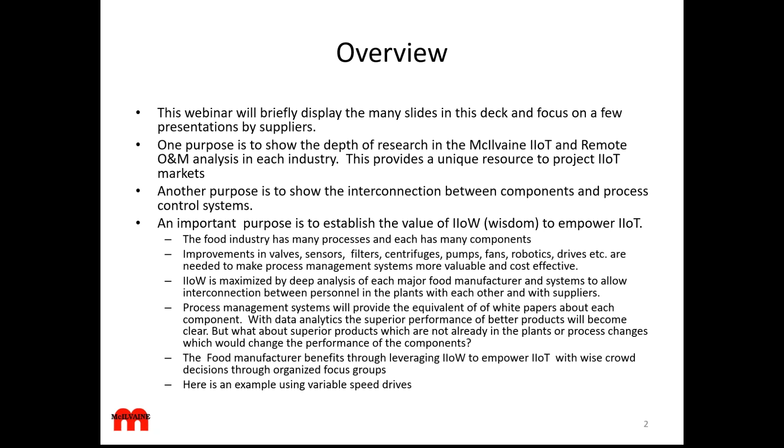Here's an example for variable speed drives. You've got two plants: one makes fructose and another one makes protein. In the fructose plant, you're recovering the energy, thereby reducing the amount of steam that's being used, with mechanical vapor recompression. That requires a fan, which also can utilize a variable speed drive.

And all of that can be remotely controlled in the cloud through a process management software system. In plant number 2, which makes the protein concentrates...

You have a dewatering subsystem with a decanter type centrifuge, and those decanter type centrifuges have very complex variable speed drives that recover the energy from the screw. Again, you've got process management software suppliers who will be monitoring the performance of that centrifuge and the variable speed drive. So you have all these different sources within each of the plants.

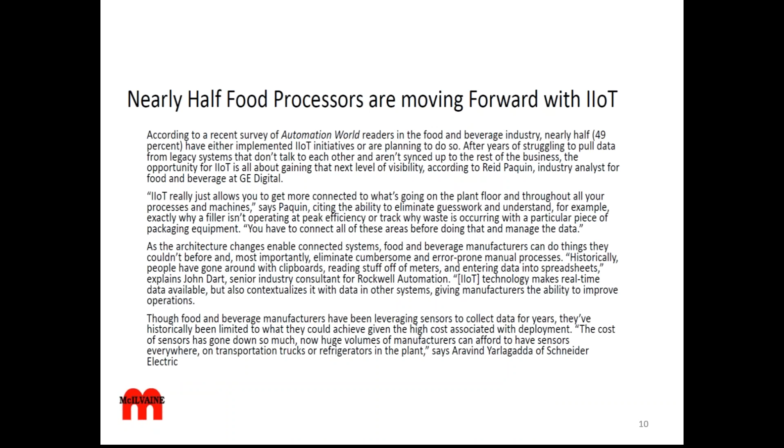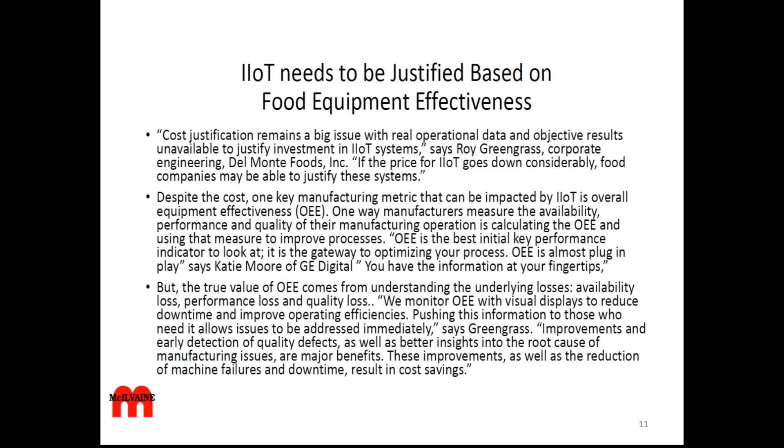We are forecasting many of the components. We have separate services that we've had for decades on pumps and valves and liquid filtration and cross-flow membranes, fabric filters and scrubbers and clarifiers and centrifuges. For instance, on the centrifuges, we've had extensive analysis of variable speed drives. There have been some variable speed drive manufacturers who just furnished the variable speed drives for decanter centrifuges. That's all they have done. Now it's expanded to where the ABBs and others are supplying those drives.

Cartridges, compressors, treatment chemicals, instrumentation, process control, emissions monitoring, and HVAC.

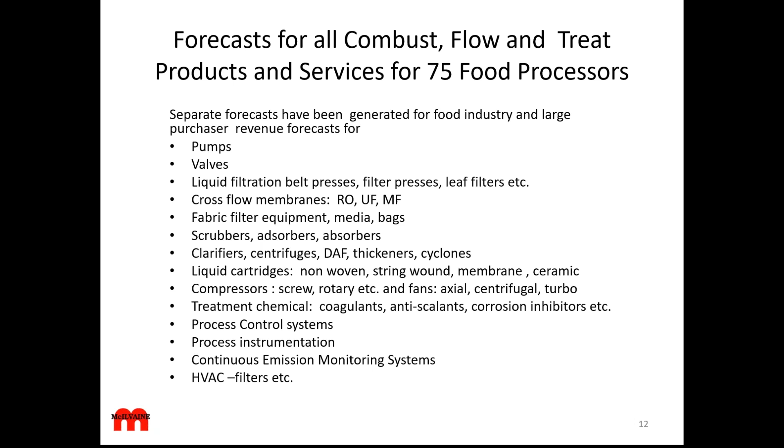Let's take a deeper dive on pumps. You can see that we are taking each of the largest manufacturers and figuring out how much they're going to spend on the different types of pumps. ConAgra, for example, is going to spend $1.9 million average per year, and virtually all of that will be in the Americas.

The concept here is not that this is a precise number and we can identify particular projects. This is statistically the average that they're going to be purchasing per year based on their size, and the supplier, if working with them, is going to know about these projects long before they become official specifications and RFQs.

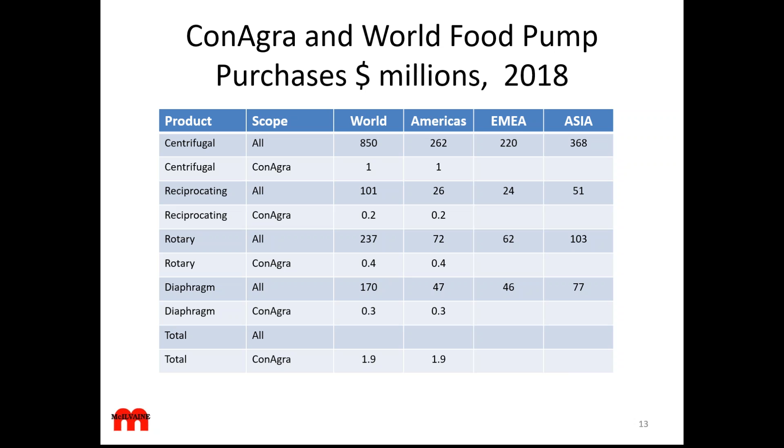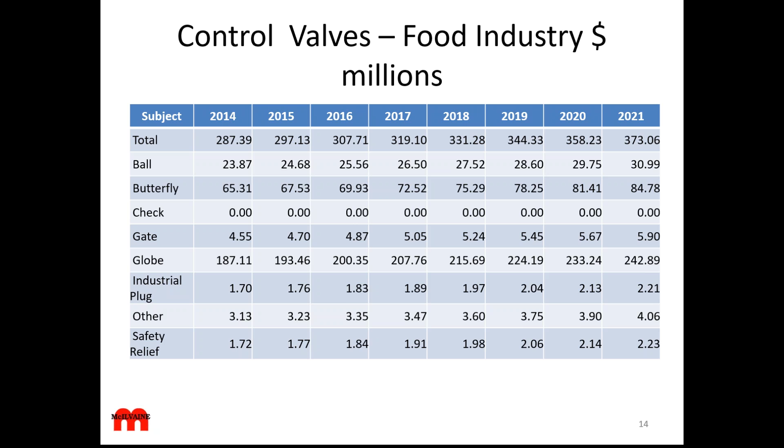In each of these industries, we already have very detailed forecasts, every country for the food industry, every type of valve, for instance control valves and on-off valves, which is a $1.2 billion market just for the food industry.

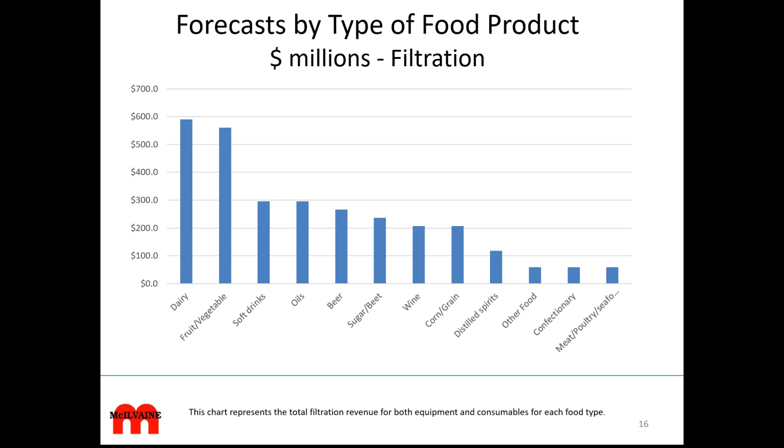Another way to look at the industry is by the types of products being made. The dairy industry portion, certainly when it comes to combust, flow, and treat equipment, would be your largest, with fruits and vegetables, then soft drinks, oils, beer, and so forth.

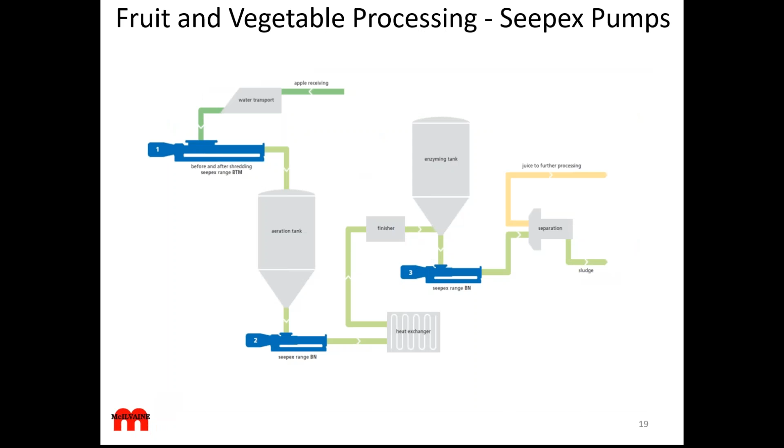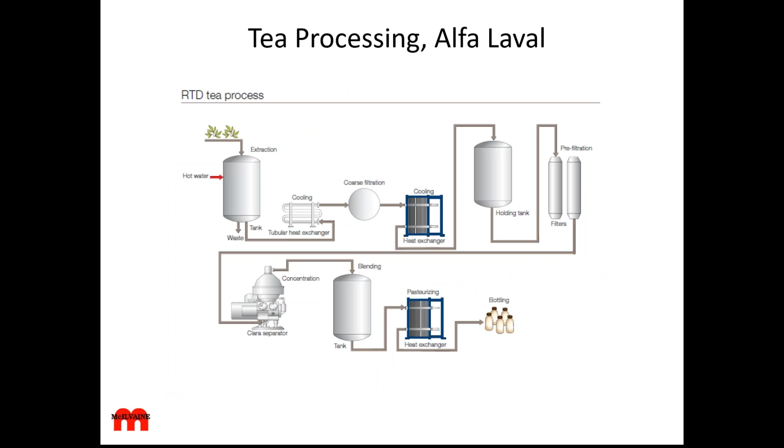The details of the processes are critical, and they need to be improved on a continuing basis. We just presented, for instance, here's where some of your slurry pumps are used, and HEPA filters are used throughout. For instance, the beer and wine processes have all sorts of separation equipment in them, as well as heat exchangers and gas and liquid treatment equipment.

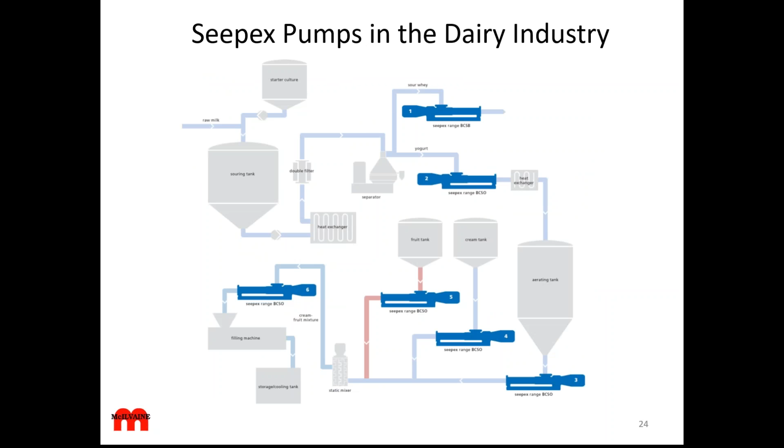Soy processing is similar, and in the dairy industry, just the rotary pumps alone would be a substantial number. Then you have some extraneous systems common to a lot of these plants, one being clean-in-place systems for a lot of your equipment.

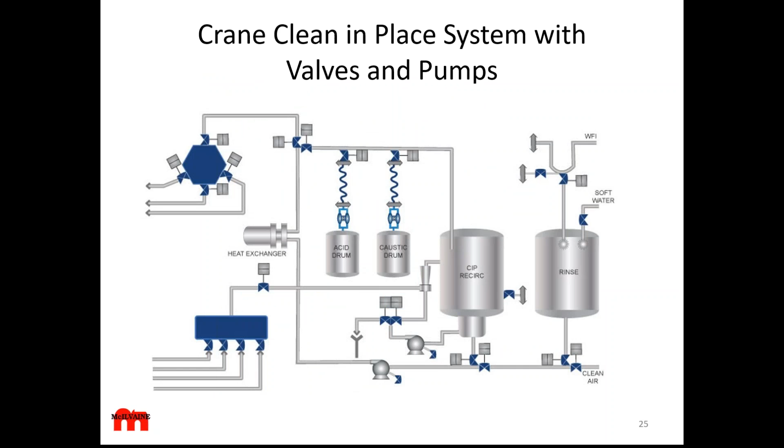Here you see the pumps and valves that would be used in many systems where you have the need for hygienic conditions, and the need to clean in place.

So we picked ConAgra as an example of a deep dive into one of the food companies, and it's basically separated into two different divisions. We are providing for each of these companies general forecasts of where their plants are and what kind of expansion plans they have.

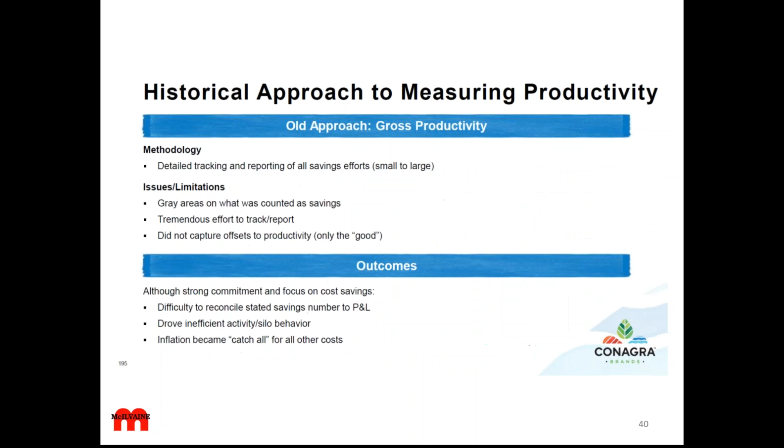And the capital expenditures, what they might be doing in terms of environmental activities, and other aspects that would be of interest to the suppliers.

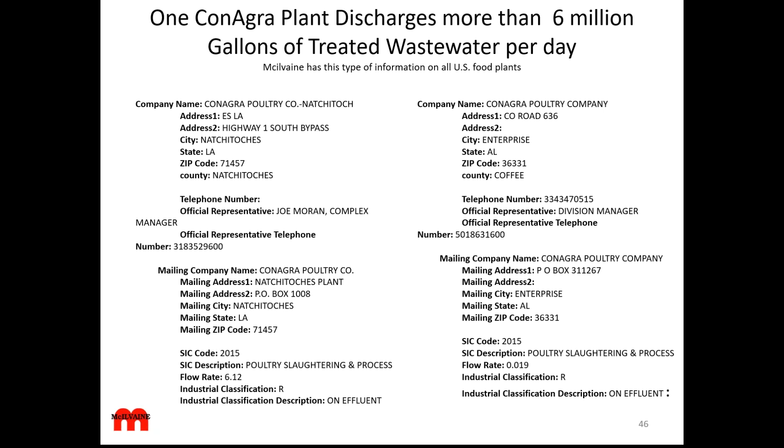We also have information on each of the plants, in fact all the industrial plants in the United States, and we have certain other initiatives in Europe and elsewhere. For instance, at ConAgra, one of their plants has a 6 million gallons per day wastewater discharge, whereas another plant only has far less than 1 MGD. So obviously having that kind of information is useful to the suppliers.

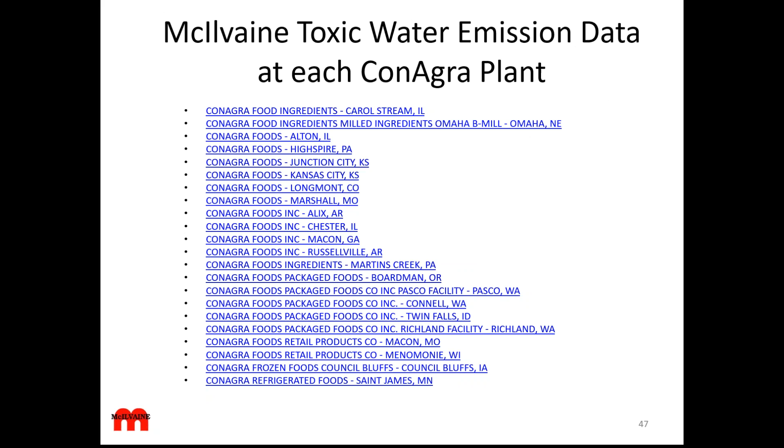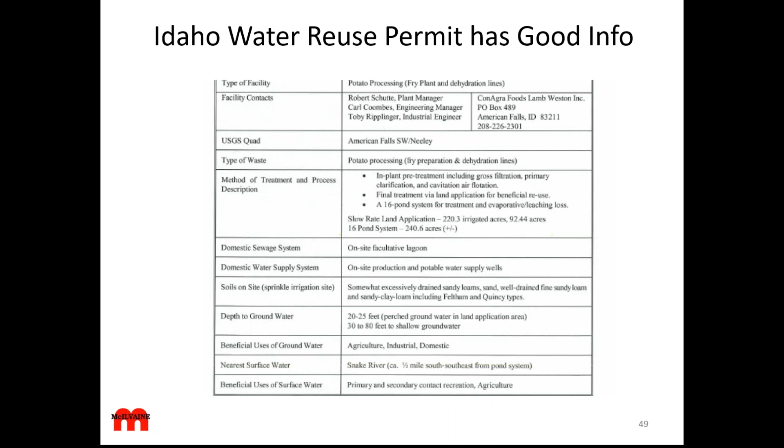From EPA, we've been able to extract any toxic water discharges at each of these plants. We also have information on all the boiler systems, with the size of the boilers and the types of equipment being used, but obviously they all have all sorts of combust, flow, and treat equipment associated with them. The water reuse permits at all these plants become valuable information as well.

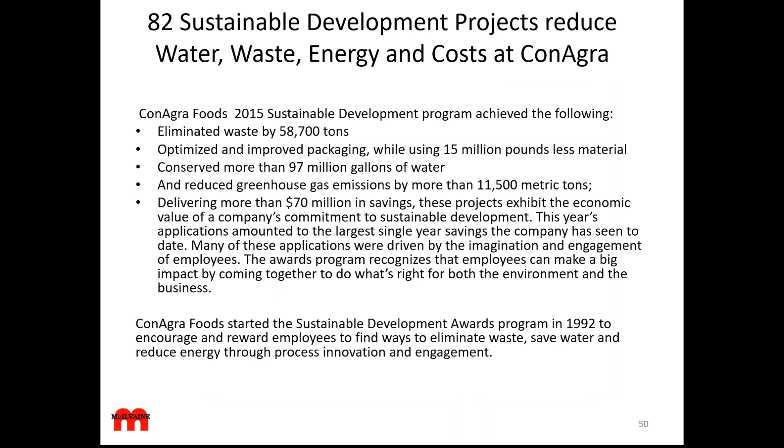And you get an idea of what the future purchases are for a company like ConAgra by viewing the information on their long-term plans for both expansion and for environmental compliance.

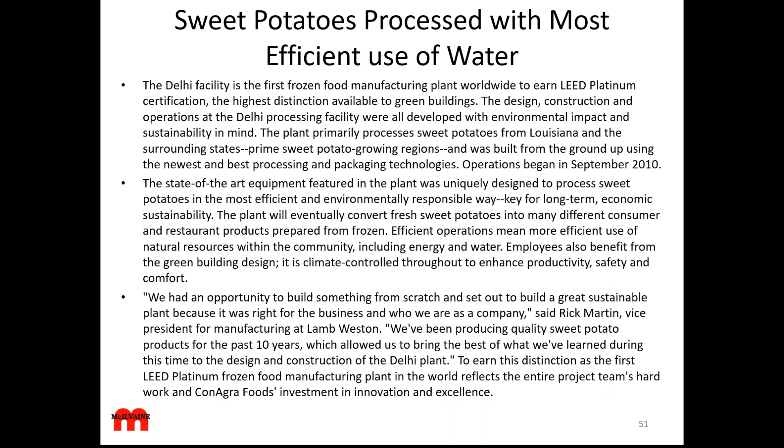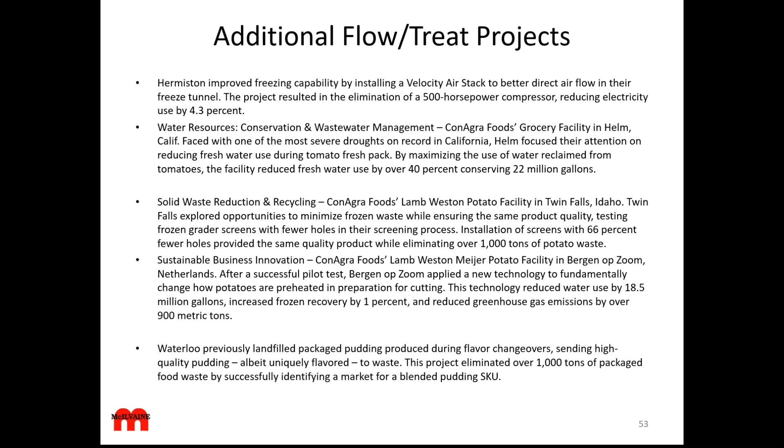ConAgra is quite concerned with the most efficient use of water, and they are producing biogas at some of their plants. In fact, we're going to learn a little bit more about that in a minute. The flow and treat projects are ongoing at many of these plants, with lots of environmental projects, and there's all sorts of equipment at these plants.

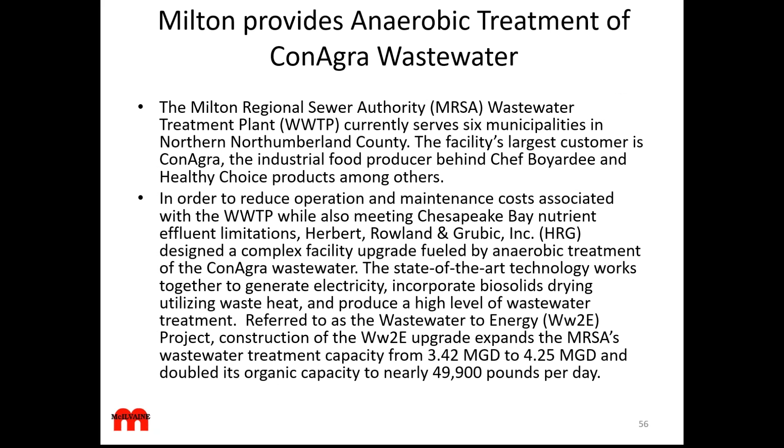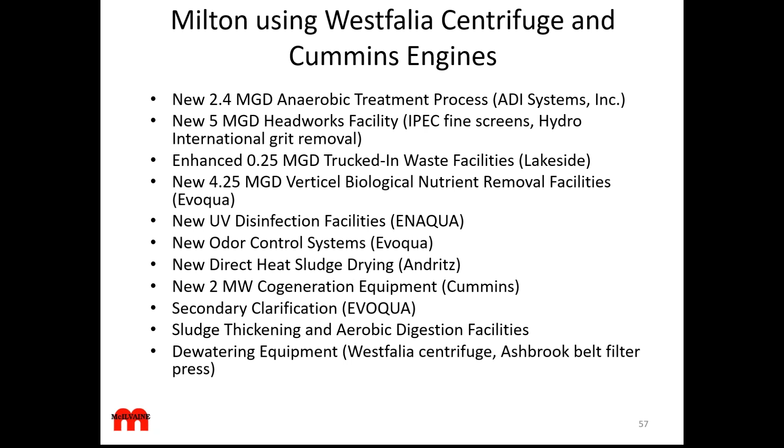Anaerobic treatment is certainly in vogue at a lot of the plants there, and they're using centrifuges. If they are generating biogas, they can use, in this particular case, a Cummins engine. And in this case, they are using secondary clarification from Evoqua.

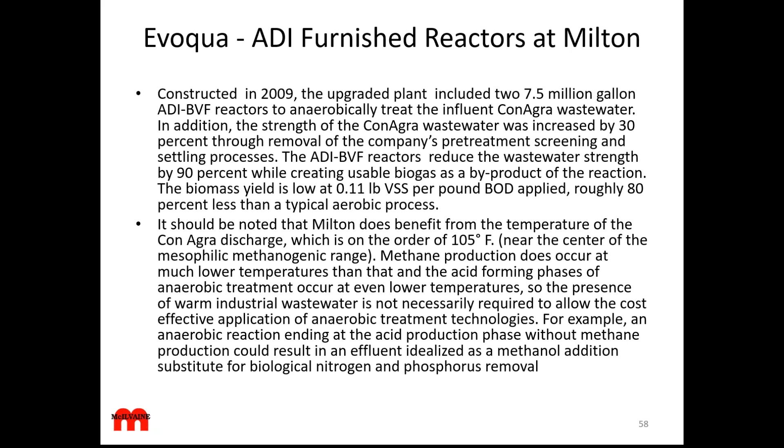So, agreed. And then you have this other installation that just went up, and I guess we'll go on to the Mexican plant here. Sure. This would be a similar system.

Indeed, so the treatment system there is also based on the ADI-BVF reactor. That's been a very successful technology for us, and especially successful - the higher the strength, the better for this reactor. And like I was saying earlier, it's able to treat high levels of suspended solids and fats, oil, and grease.

Which is not always the case. Often you have to do some kind of pre-treatment ahead of anaerobic digestion when you have a lot of solids, so then you have solids removal, and then you have to deal with the solids or fat that you're removing - there's an additional disposal cost. In our case, we receive the suspended solids, and with the longer retention time the ADI-BVF reactor is designed with, we have the time to take those more complex organic materials and turn them into biogas.

So at the plant in Mexico, it's a canning facility. They produce whatever is in season in that area of Mexico, central Mexico. You might have corn during part of the year that's coming out of the fields, and that's being transformed into canned corn for commercial consumption. You might have some jams, some sauces. There's of course, being Mexico, hot chilies, so those are being canned as well. So depending on the time of year, you'd have different production practices, and of course the wastewater being generated at different times of the year will change as well.

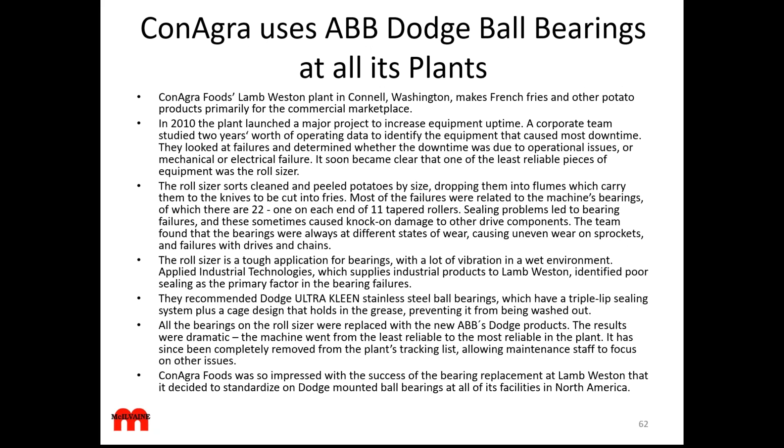The ABB Dodge ball bearings are being used in many of, almost all, the ConAgra plants. They standardize on these for their conveyors, and they have various different information platforms.

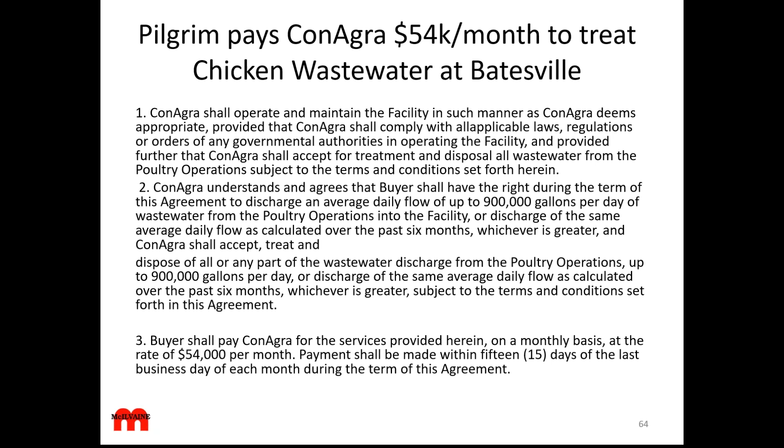One thing that maybe is a little out of context here, and I should have mentioned this before too, is that ConAgra, back on our first installation discussion with Jose, they've actually contracted for that city waste, so they would be the ones making decisions about anaerobic digesters rather than the city itself. But another way they're expanding their activities is treating wastewater from some industrial plants, such as Pilgrim, which is paying $54,000 a month for ConAgra to handle their waste.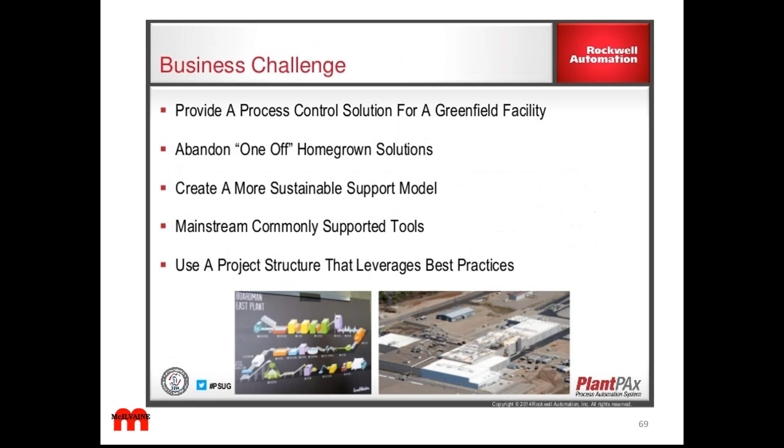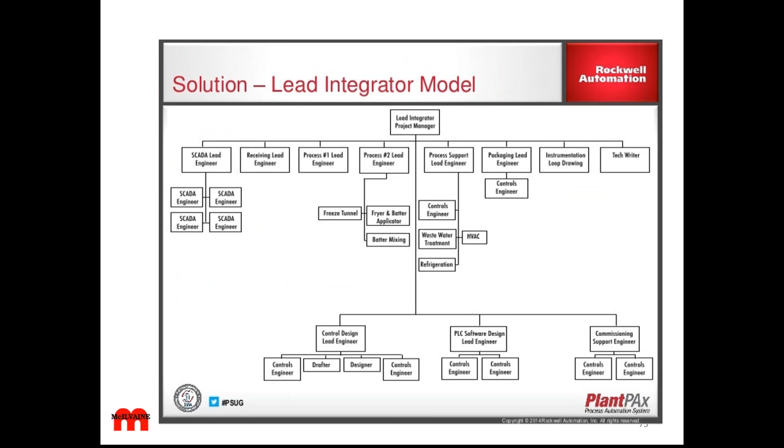So some more of the software that's involved here, IBM software. Here is a more extensive analysis of the Rockwell automation systems provided by the systems integrator. I'm not going to spend a whole lot of time on this other than noting the fairly complex number of processes at the plant that are being controlled.

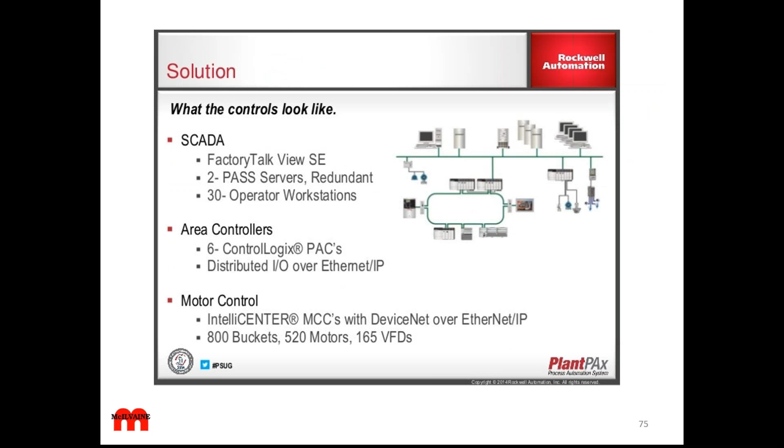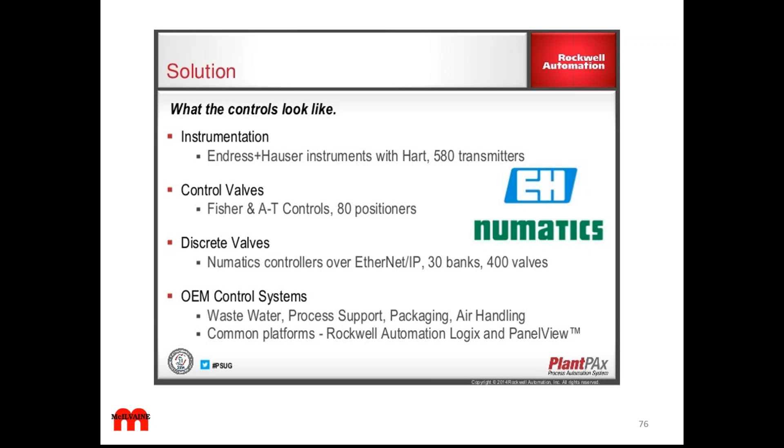The new projects, of course, have to be considered when you're putting in these systems, and all the SCADA controllers and motor control. As we say, the foot soldiers really are your valves and instrumentation. In this particular case, they're using Endress+Hauser equipment, the Numatics controllers, Fisher and A-T Controls.

There are always projects going on at these plants, and so from the supplier standpoint, if there's a new compressor going in, aseptic systems for the sucrose and so forth, that it's necessary information if you're working with these plants.

LinkedIn is, I think, revolutionizing the way that you can deal with individuals, because each individual—and there are 8,600 of them at ConAgra—is on LinkedIn because he wants certain information, and he can control that information because you can connect with individuals, select who you connect to, and disconnect from individuals.

And so the opportunity is what we were talking about on that second slide, that there would be individuals at ConAgra that are just interested in variable speed drives, or just interested in anaerobic digestion, etc. So now let's go into some of the components that are in these systems.

We decided to put a number of slides in on ABB, because we do believe that ABB, Yokogawa, Siemens, GE, Rockwell, and companies of that type, with the wide scope of electrical equipment, are well suited to be involved and to understand all these systems.

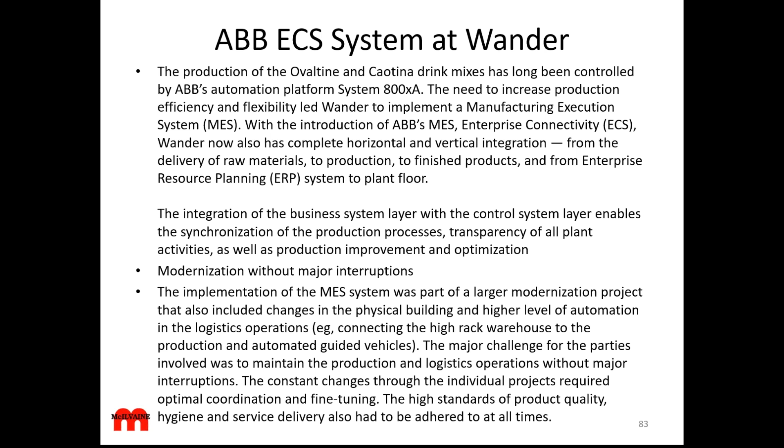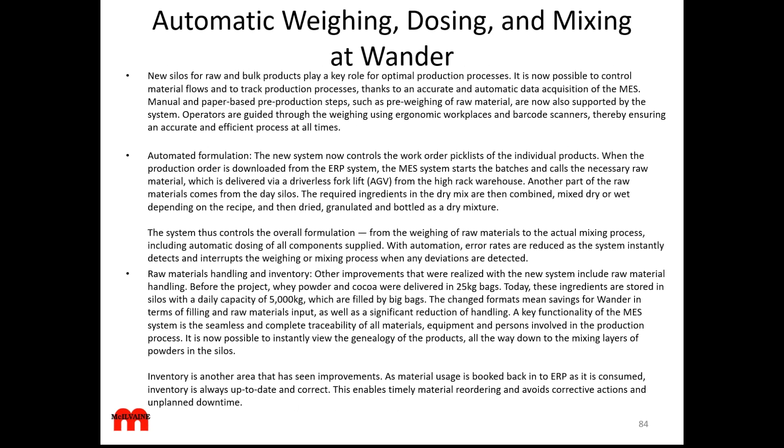So somebody like ABB, certainly since they're providing the automation platform system, needs to understand all these processes, but they also need to understand the ins and outs of automatic weighing, dosing, and mixing, and all the different processes within the plant. This happens to be one at DSM that ABB is involved in, showing how you get efficiency improvements.

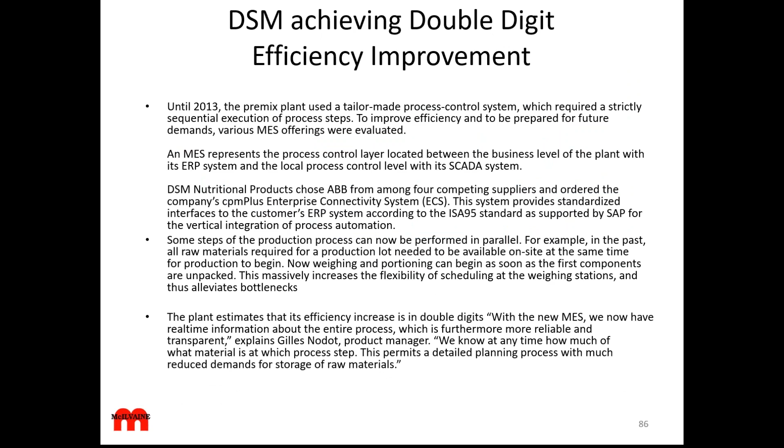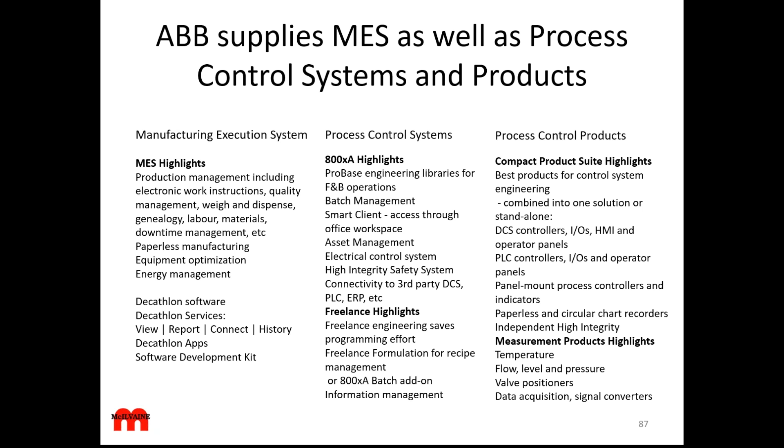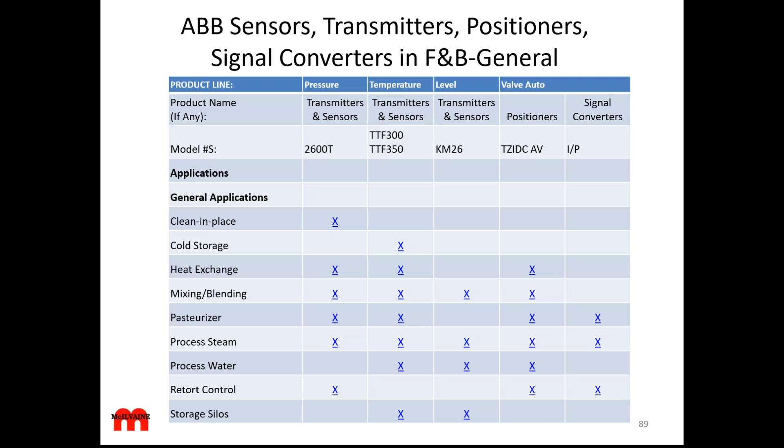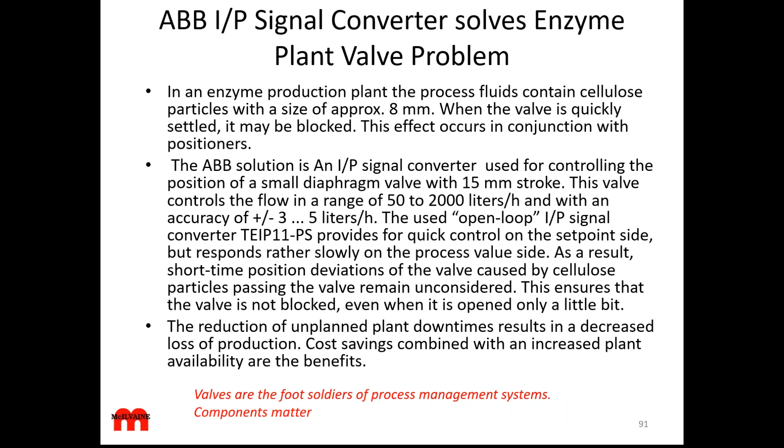And they have a range of products, from manufacturing execution systems, process control systems, all these process control products, but they also have all these sensors and positioners in all these different areas. The devil is in the detail, with I/P signal converters and other things that can basically improve an operation.

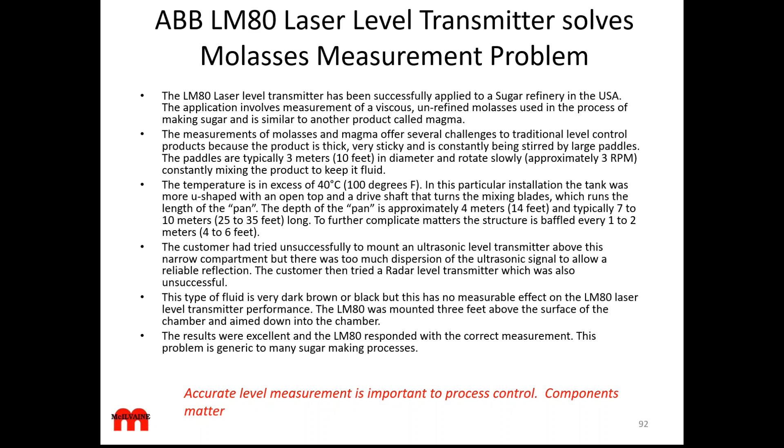Your whole software system is no better than the accuracy of your level measurement, and where you have problems and can solve those problems with unique transmitters, it is a major step forward in cutting the cost of operations. Even things like motors that have a wide speed range can help optimize operations.

Variable speed drives allow the process to achieve maximum energy savings, and many plants should be installing variable speed drives on applications where they do not now exist. So this is a big opportunity.

Our beta site for this deep dive into individual companies is, again, BHE, and BHE did undertake a very expensive study that indicated there are hundreds of variable speed drives that should be installed just on the plants they have in Utah and on the Pacific Coast, let alone the ones in MidAmerican and NV Energy and their renewables group.

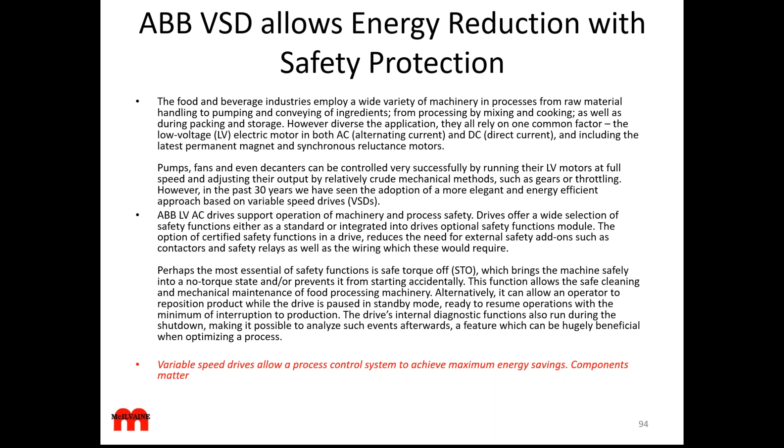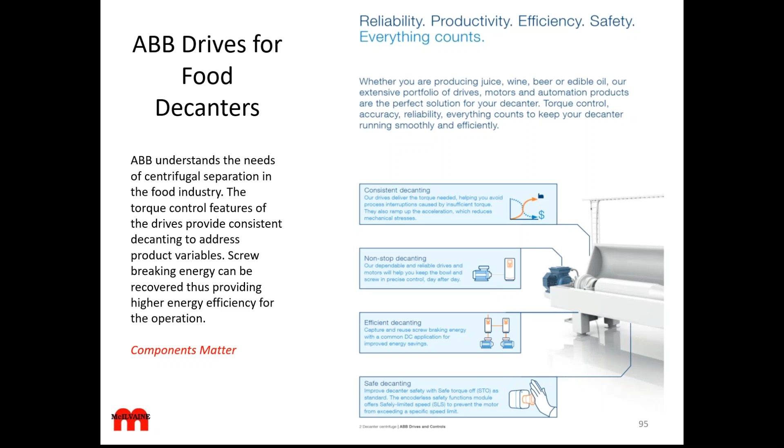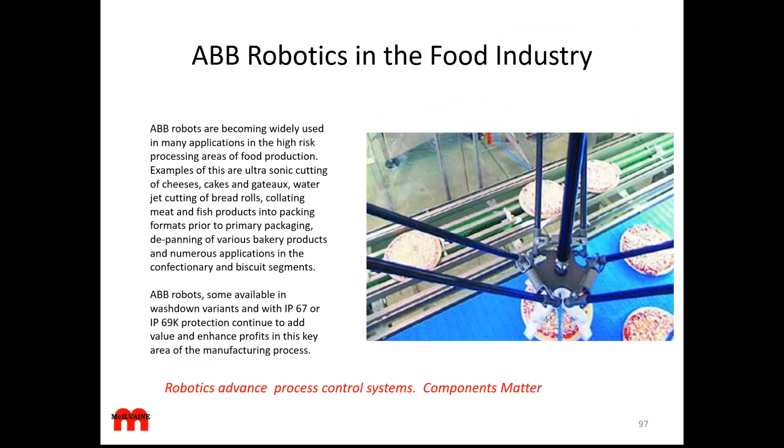The understanding, if you're a drive manufacturer, of something as complex as recovering the screw energy, braking energy, in a centrifugal decanter centrifuge is important. And obviously the PLCs—in the case of ABB, they also have the robotics, which can be a very important addition to a process control system.

Accenture is actively involved with analytics and strategic analysis in the industry.

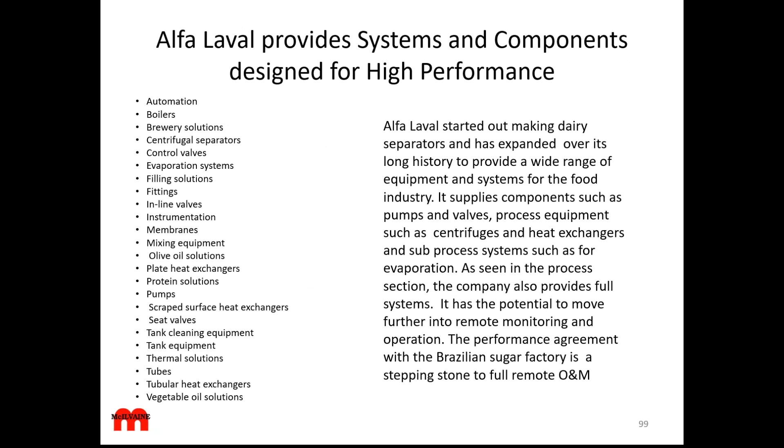Alfa Laval is well positioned because of tremendous knowledge of all these food operations, where they have the processes, and they additionally make the centrifugal separators and control valves. They have the membrane equipment, and they're very big in heat exchangers, and they do provide complete solutions as well.

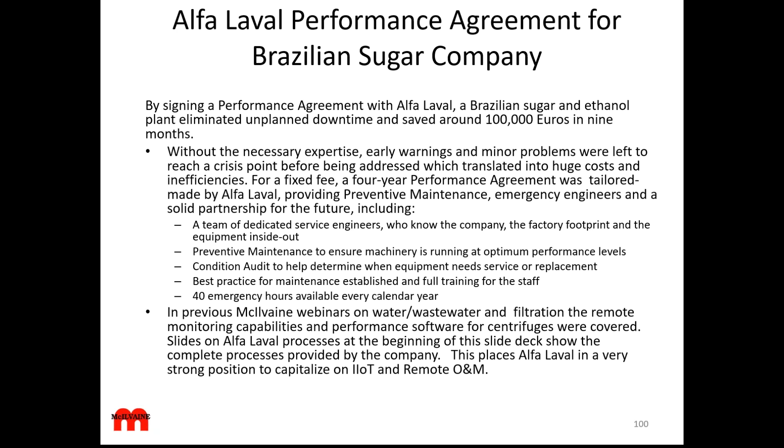The performance agreement that they have at a Brazilian sugar company is really the predecessor of complete O&M operations, which with IIoT can now be accomplished.

Alfa Laval is taking it to the next level by focusing on value streams like fats, oils, and greases. It's interesting that Jose has presented one aspect, which is you have a simple, flexible system, and you can recover the energy from those fats, oils, and greases. Alfa Laval is taking the opposite tack here, that these are high-cost disposal items, and that you can actually recover them and use them.

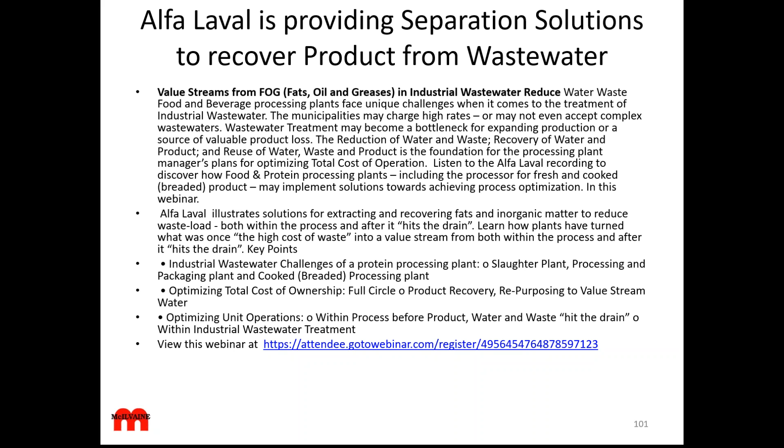I think there are good arguments to be made for both under certain conditions—where you have very valuable fats and oils, maybe that is true, or it might be complex to take them out. So I think there's a good reason to consider both options and make a decision with both of those options in mind.